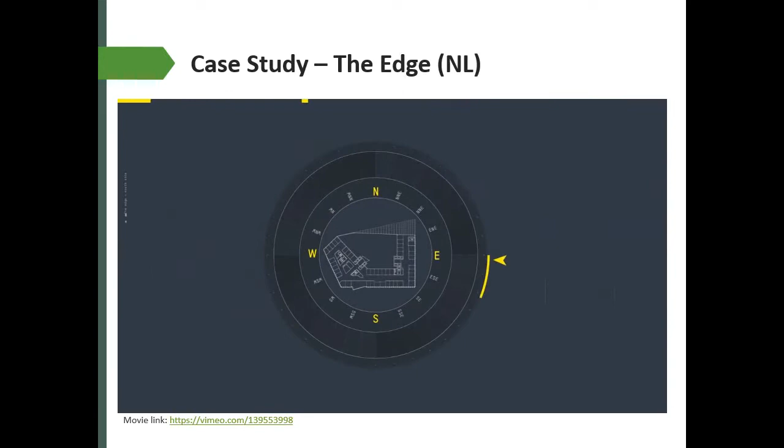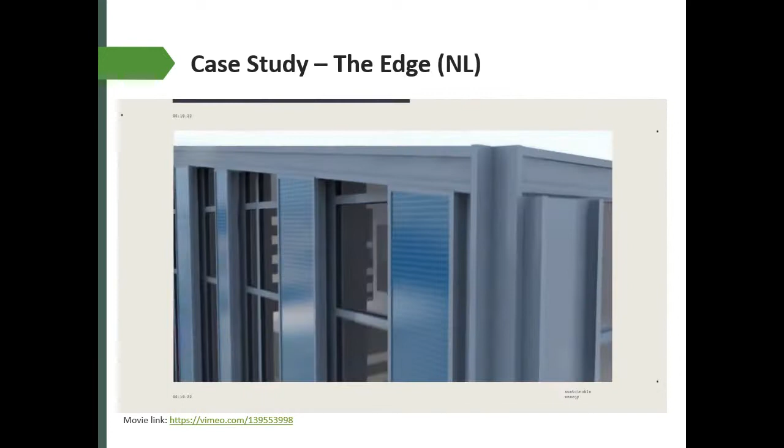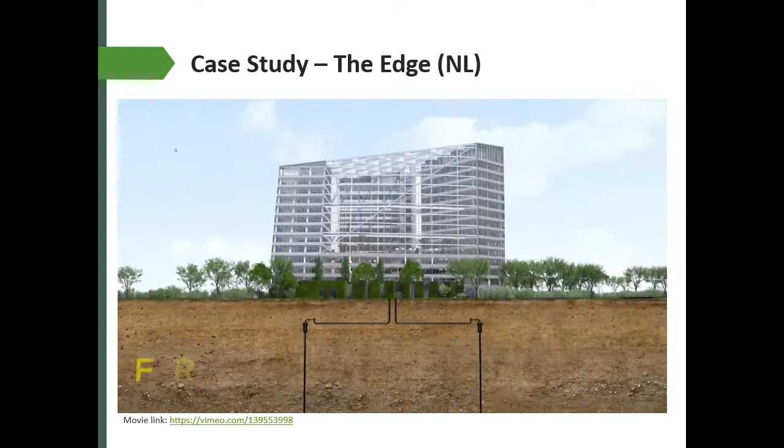There's a new addition to the Amsterdam skyline, a landmark office building pushing the envelope in design and sustainability. An architectural gem located in the heart of the economic and financial center of the Netherlands, meeting the requirements of the modern-day client, offering the new office experience. The Edge, the most innovative and sustainable office building in the world. Its unique design and orientation is based on the path of the sun. The glass facade on the north side bathes the workspaces in daylight, while solar panels on the southern facade shield the workspaces from the sun and generate enough sustainable electricity to power smartphones, laptops, and electric cars. The solar panels covering the roof provide electricity for the aquifer thermal energy storage that generates all energy required for heating and cooling the building, consisting of two 130-meter deep boreholes combined with heat pumps.

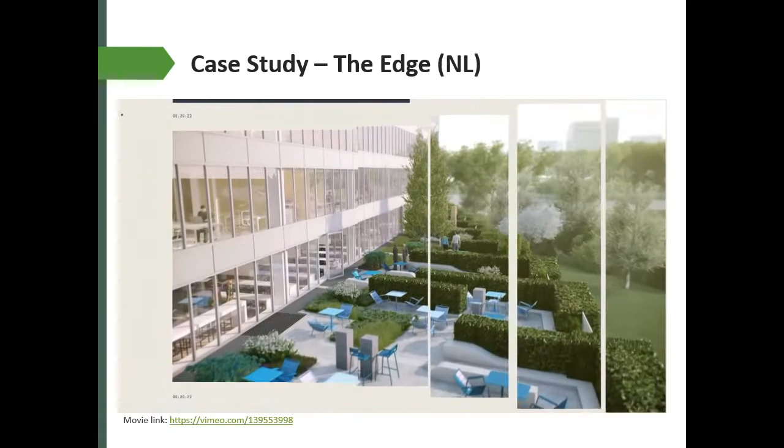The Edge endeavors to include as much of the surrounding environment as possible in its sustainable practices. Even the temperamental Dutch weather is put to good use, including rainwater, which is collected to flush toilets and irrigate the ecological terrace and other garden areas surrounding the property.

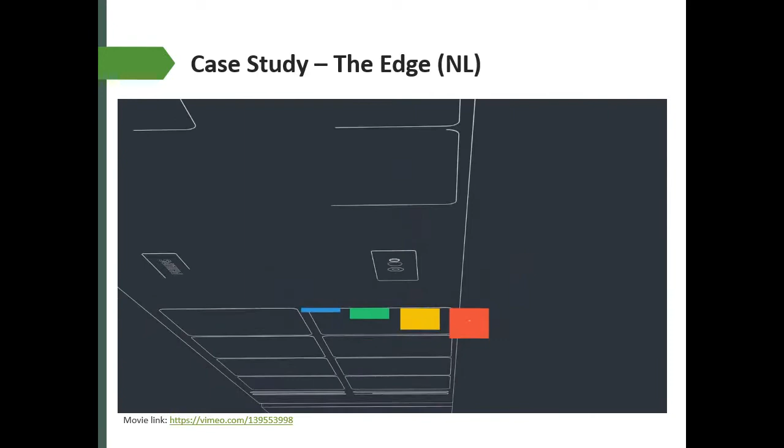Being one of the most innovative buildings in the world, the Edge is equipped with a custom-made, state-of-the-art connected lighting system. With over 6,000 LED luminaires, the system uses the building's lighting infrastructure for more than just illumination. Every second luminaire is equipped with a multi-sensor measuring movement, light, temperature, and infrared, each uniquely identified and seamlessly integrated into the IT network of the building.

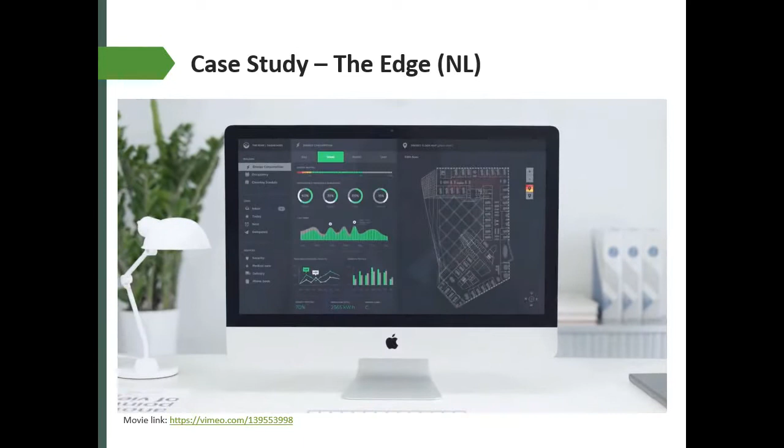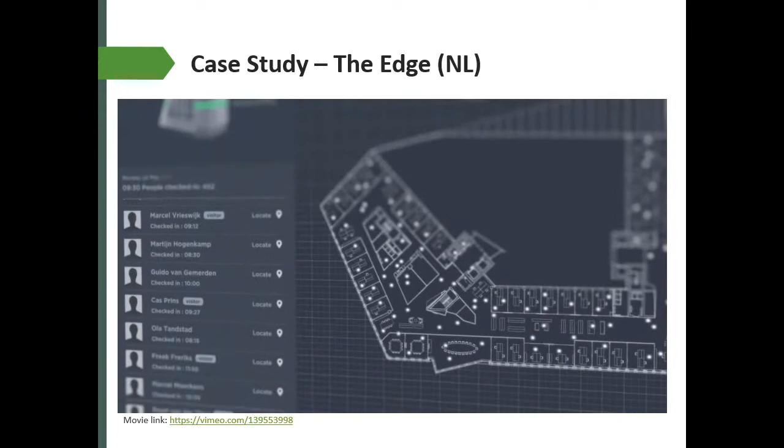Comprehensive data is gathered and processed by Deloitte Data Analytics. This information is presented to the facility manager on a dashboard, providing real-time and historical information about the building's usage, enabling precise monitoring and management of every facet of the Edge. When an office floor is empty, all lights are automatically switched off and ventilation is set to a minimum. As soon as someone arrives, the connected lighting system provides 300 lux illumination and adjusts the ventilation to the desired level.

Employees can also act as owners and operators of the space. With a smartphone or tablet, they can set the temperature and lighting to support their individual preferences. The app also enables them to view and monitor their sustainable behavior. One can always work greener.

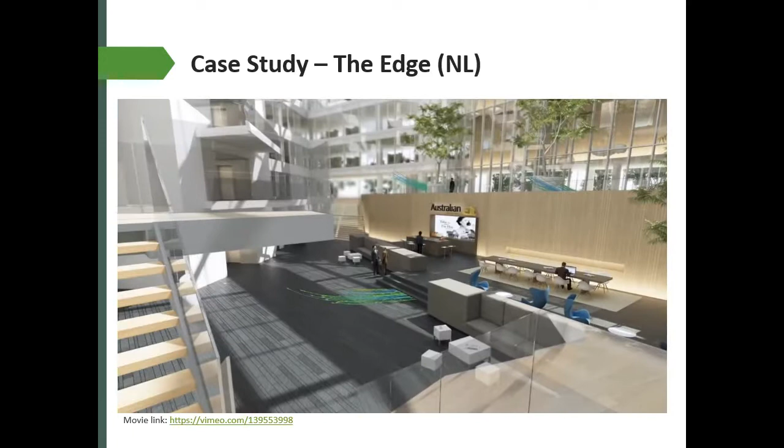The atrium is the breathing heart of this new and exciting business community. Secondary air from offices is transferred into this majestic open space. When it reaches the top, the air passes over two thermal wheels and is released out of the building, while fresh conditioned air is blown in at ground level. The atrium makes corporate interactions more enjoyable than ever before.

The Edge is ahead of its time. This unique building utilizes a combination of environmental and technological innovations to create a truly revolutionary business ecosystem, not only good for the inhabitants, but also good for the environment.

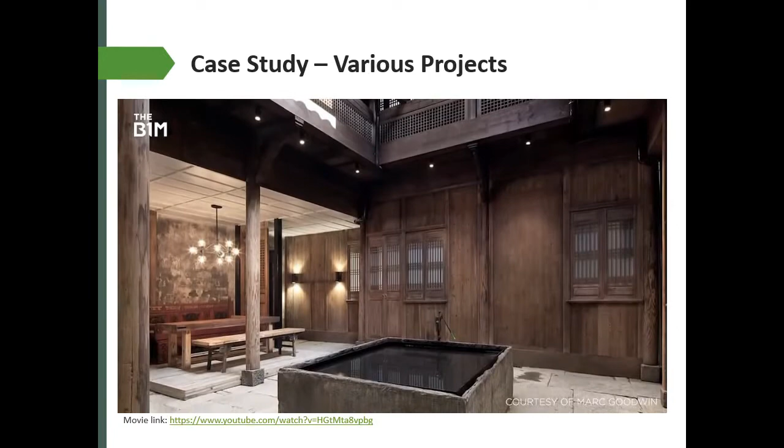In an effort to retain heritage, reduce waste and overcome the challenge of finding sites in densely occupied urban areas, architects, engineers and developers are breathing new life into existing structures and the communities around them. From historic grain silos that are now museums, to congested elevated roadways that have evolved into calming green parks, these are some of the greatest examples of reinvented structures.

The ongoing revival of Copenhagen's industrial waterfront has seen a number of existing structures repurposed to serve the city's growing demand for apartment living. The most impressive of these is undoubtedly Gemini Residence, known as The Silo: the adaptation of two silos formerly used by a soybean processing plant into a single unified structure featuring 84 apartments. Balancing their desire for waterfront views with the need to minimize penetrations in the silo and preserve the integrity of its superstructure, architects and engineers hung apartments from the exterior of the silo structures.

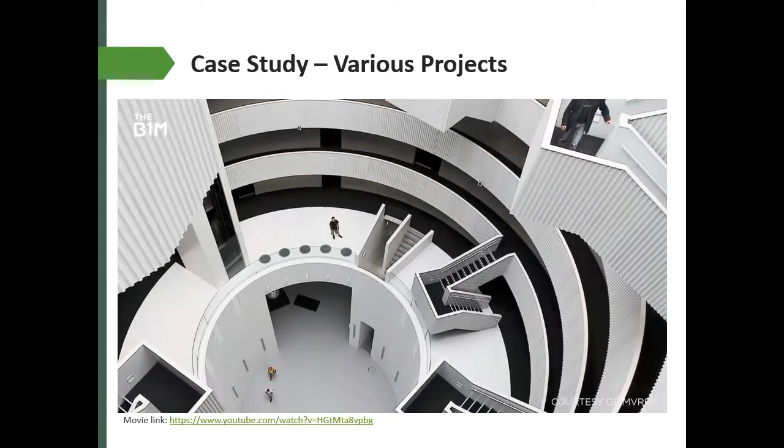This approach enabled the silo interiors to be remodeled as full-height lobbies, creating open and naturally lit atria for residents.

Following in the footsteps of Paris's Promenade Plantée and New York City's High Line, Seoullo 7017, widely known as the Seoul Sky Garden, adapts disused transport infrastructure to deliver much-needed green space within a densely developed urban area. With a number of elevated highways being decommissioned, city planners elected to repurpose some overpasses for pedestrian use, improving connections while providing much-needed green space.

Opening in 2017, the Sky Garden runs adjacent to Seoul Station and now consists of more than 24,000 individual trees, plants and shrubs along its kilometre route through the city. Standing 17 metres above its surroundings, a number of bridges and staircases have been installed to link the structure with surrounding shops, hotels and neighbourhoods.

First constructed in 1921, this grain silo on Cape Town's waterfront stood as the tallest building in sub-Saharan Africa for over half a century. Now, the structure's interior has been impressively carved open to create one of the continent's leading contemporary art museums.

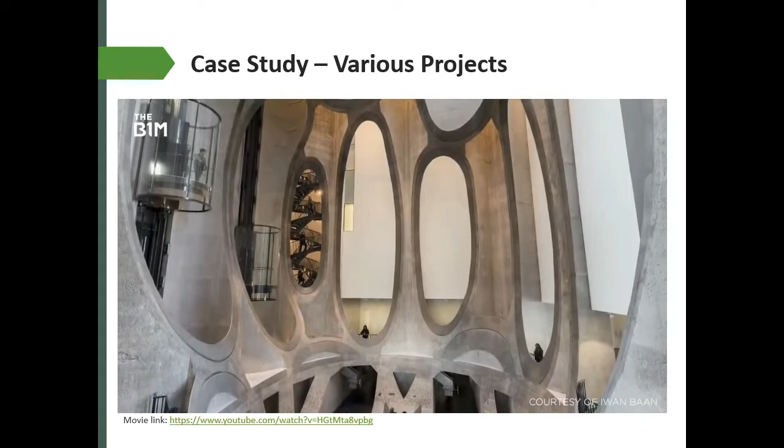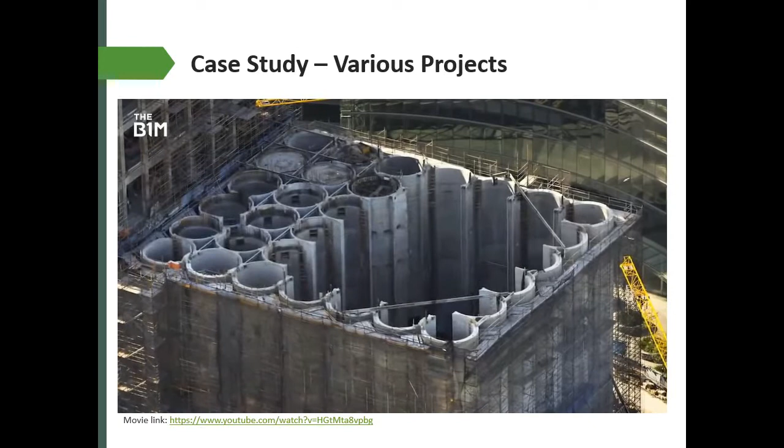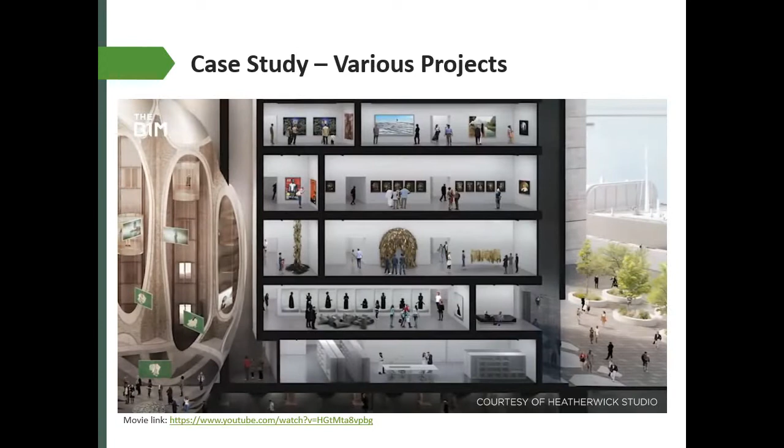While the building's exterior remained largely unchanged, internally, some 73% of the concrete silos within the structure's storage annex were demolished, while much of the 58-metre elevator tower's interior was removed. These adaptations made room for numerous gallery spaces, along with a luxury hotel, restaurant, and rooftop sculpture garden.

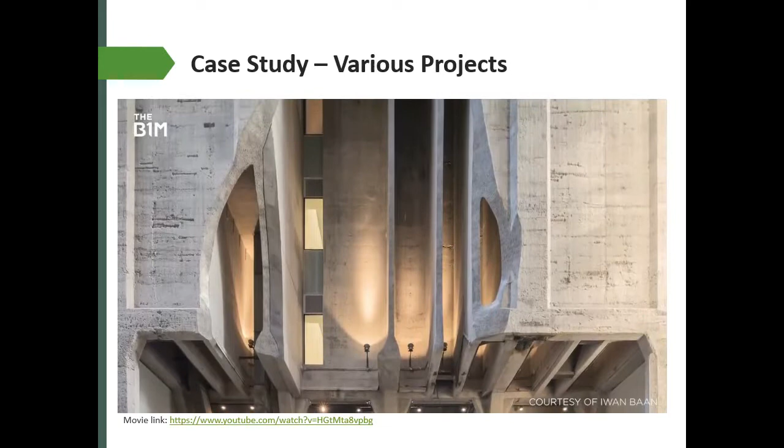At the museum's core, a number of the remaining silos have been retained, but carved away to create a breathtaking cathedral-like atrium that stretches up 27 metres through the building. Nodding to the structure's heritage, the ovoid form of this space mirrors that of a grain of corn that was digitally scanned at design stage to inform the plans.

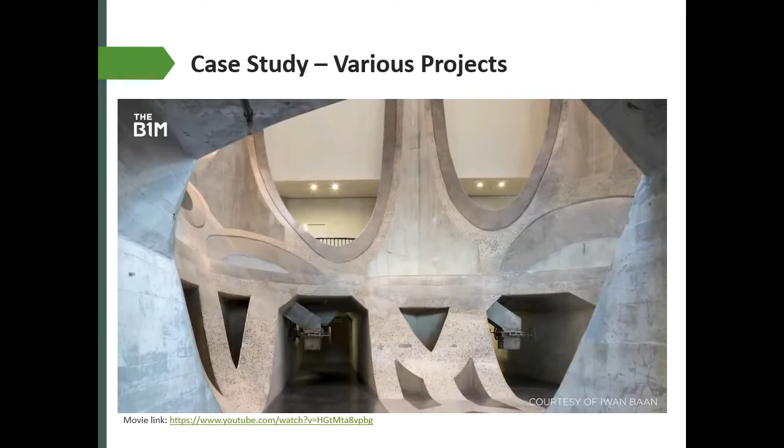Outgrowing their original premises, bespoke hatmaker Optimo converted the City of Chicago's historic firehouse in 2018, consolidating all aspects of their design and production operations into a single facility.

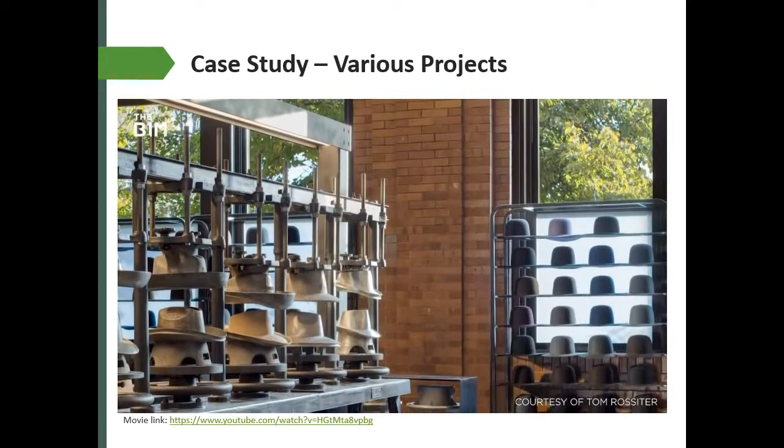Shunning the idea of a new-build industrial facility and instead making use of the century-old building, Optimo selected the site for its location, reaffirming their commitment to the local community. The ground level now serves as a factory, while the first floor has been refurbished to house offices and design studios.

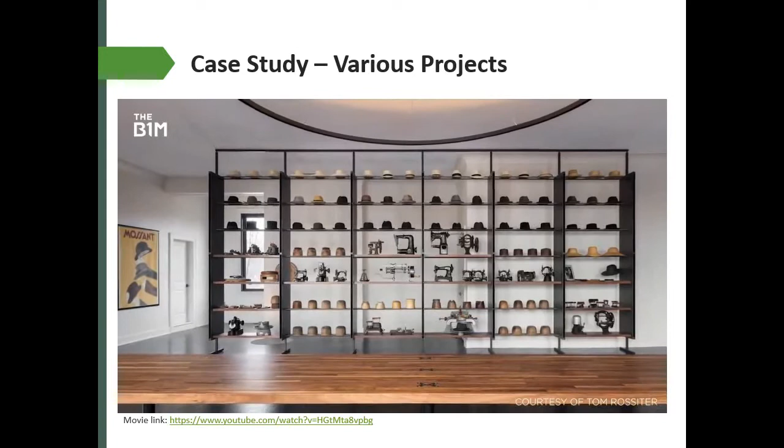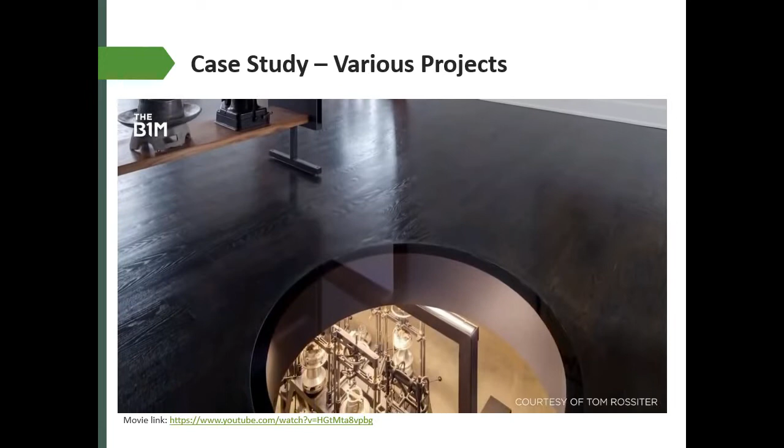Despite these adaptations, many of the building's original features have been retained. Openings in the floor where fire poles once stood are now portholes offering views into the factory, while marble from the original firehouse has been repurposed in the kitchens.

Built inside a historic church dating back to 1884, this library, museum and community centre has become a vibrant part of the city of Vught in the Netherlands. Opened in mid-2018, the conversion has already garnered significant acclaim for its impressive multifunctional use of the internal space that remains respectful to the structure's original design and purpose.

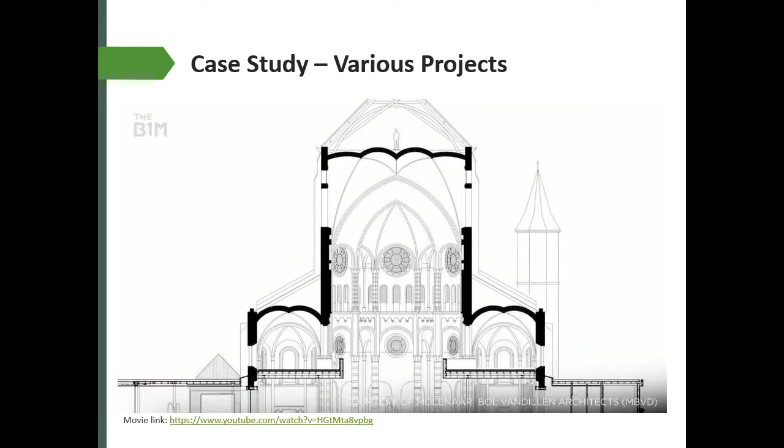While much of the church itself has been preserved in its original form, modern additions, both internally and externally, have added new layers to the building. External pavilions provide new space for shops and restaurants, while a new internal mezzanine floor creates unique spaces within the church for studying and community use.

Many of the library's bookcases are fitted on tracks, allowing them to be moved aside to create an open, multi-use space in the heart of the church.

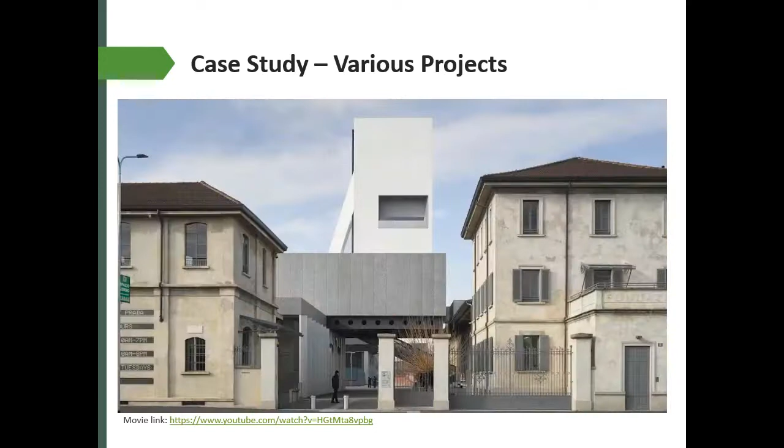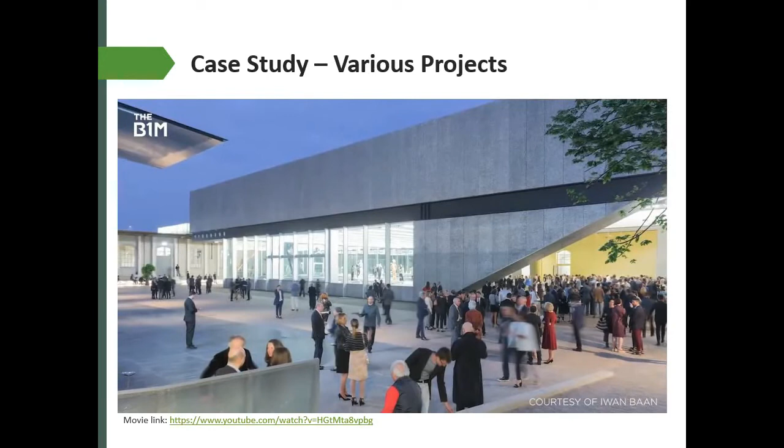Completed in 2015, the conversion of this disused gin distillery in Milan created an exhibition, gallery and event space for the Fondazione Prada, an institution dedicated to contemporary art and culture. Consisting of several existing buildings and 3 new structures, the converted distillery now provides more than 19,000 square metres of space around a central courtyard.

While appearing relatively modest from the exterior, the facility is easily identifiable by its striking 4-storey tower clad in 24-carat gold leaf.

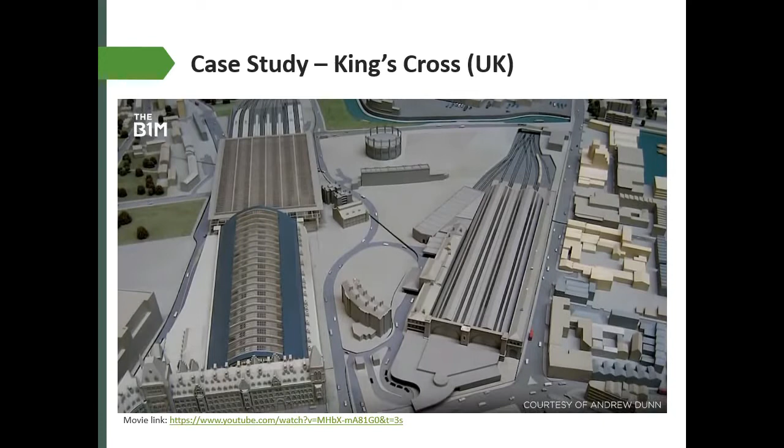With the new rail link requiring the demolition of a number of disused buildings and the reopening of the St Pancras Renaissance Hotel, developers began to envisage the wider redevelopment of the district.

In 2006, plans were submitted to regenerate the area bounded by the King's Cross and St Pancras railway stations, York Way and the new rail lines into a new residential, entertainment and commercial hub for London. Reimagined as King's Cross Central, the proposal would see new life breathed into the 67-acre site, with 50 new and restored buildings, 20 new streets, some 2,000 new homes, and over 26 acres of new public space.

With the completion of High Speed 1 and the transfer of Eurostar services from London's Waterloo Station to St Pancras in 2007, and with much of the land previously taken up by construction work now available, the area's regeneration moved into overdrive. The historic King's Cross station itself received a major renovation, while an impressive expansion in 2012 brought it up to the same standard as its newly completed neighbour.

Concurrently, restoration of a number of historic buildings and the creation of several new public spaces began, with the Central St Martin's branch of the University of the Arts London relocating their campus to the restored Granary Square warehouse in 2011. The rejuvenation of Regent's Canal and the newly opened Granary Square further enhanced the appeal of the district, with many cafes, restaurants and public amenities opening through the area.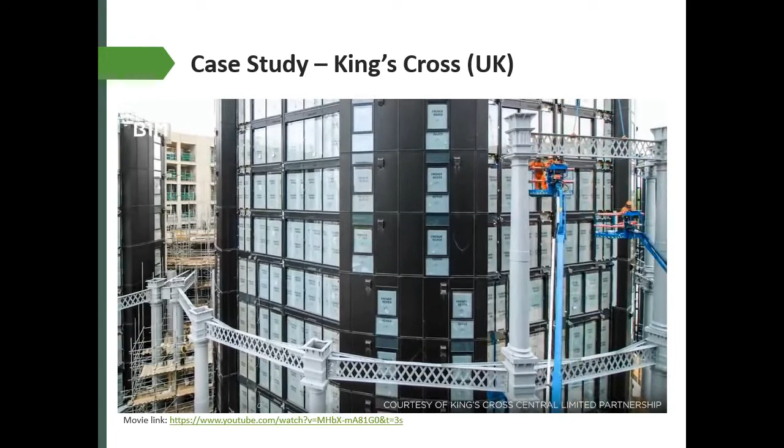While the majority of the former gas holders that once covered a large portion of the King's Cross site were removed, 3 of the Grade 2 listed structures were restored and transformed into the remarkable gas holders residential complex. The process of retaining and reinventing these historic facilities required their original structures to be carefully dismantled and transported to Yorkshire, where each section was restored. They were then returned to London for reassembly on site.

Currently emerging between Pancras Square and King's Cross Station is Google's first wholly owned and designed building. Just as the regeneration of King's Cross has been praised for its retention and restoration of historic structures, its commercial components have set new benchmarks in sustainability and attracted a number of global technology giants to the area.

The district's northernmost quarter is home to a number of low-rise commercial buildings with a strong emphasis on human interaction and community. The eye-catching R7 makes use of terraces, flexible floor plates and extensive end-of-trip facilities to encourage collaboration and a healthier lifestyle for its occupants.

In 2018, Facebook announced that it would be constructing 3 buildings totaling 57,000 square metres to create a new London headquarters in the area. Sitting at the very heart of King's Cross, Pancras Square is surrounded by 7 commercial buildings which are now home to the likes of Google, YouTube, Havas and Universal Music. Global brands attracted by the area's 6 underground tube lines, 2 mainline stations and high-speed international rail service.

Currently emerging between Pancras Square and King's Cross Station is Google's first wholly owned and designed building outside of the United States.